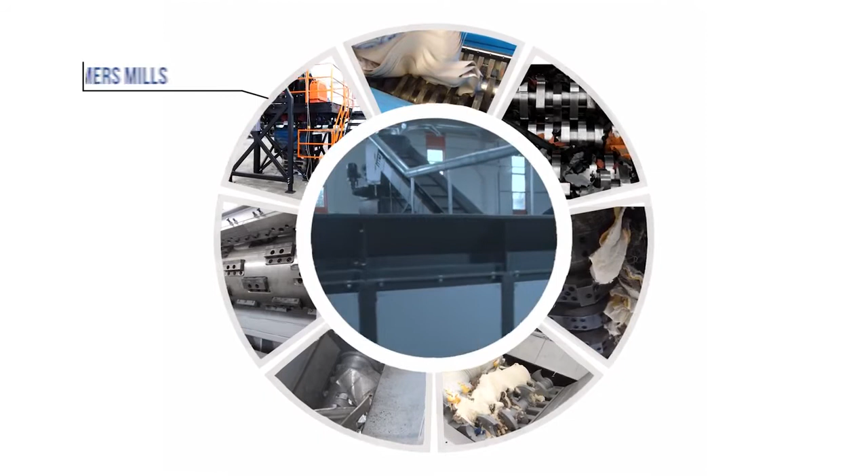So now Mr. Emanuele will explain in detail our range of products, starting from the single machine and then going on with the different complete installations. Please, Emanuele, it's your turn. Thank you, Luisa, thank you for your introduction.

So Forrec, as Luisa said, was born with the production of single machines. One of the first machines we produce is an evergreen product: the primary shredder, a two-shaft shredder, combining different kinds of options in terms of manufacturing. You can have different kinds of blades, like fixed blades in iron and steel, bolted knives in case of a quick change, or a knife refilled by a welding robot. We have a really large and huge size of dual shaft shredders, combining different power for different applications.

The other range we are currently producing is the four-shaft shredder, which reduces the volume, but at the same time gives you the possibility to size the waste according to your wish, for the downstream that you have later on.

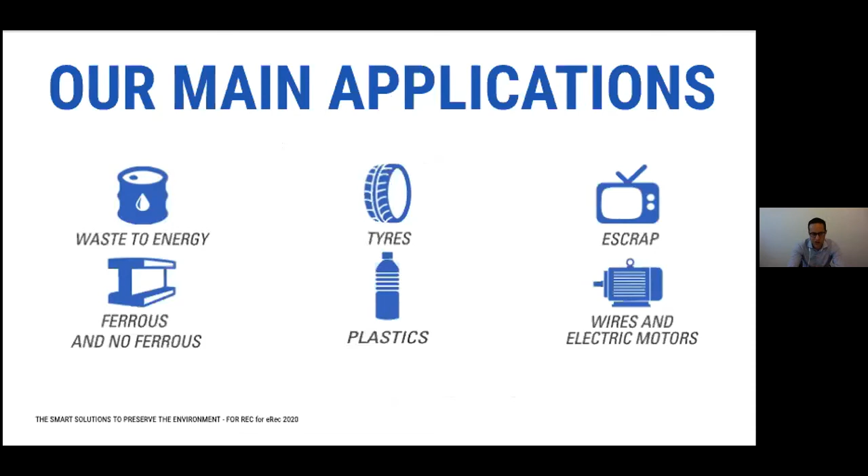So in general, as I said, and as you saw before, the machines that we design and directly manufacture are located within more complex and engineering plants suitable for the treatment of tires, e-scrap, refrigerators, or wires, or motors, or plastic. So a large turnkey solution that we can offer to our customers.

So let's go a little bit in detail and try to figure out the right steps to the correct and profitable recycling technology. The price is something that comes really at the end of your choice. But what we want to focus on is that the choice of the right machine is really important.

And that's the reason why I always insist to be not a sales, but a consulting, because by knowing exactly what is your kind of waste, what's your purpose, how the waste is - because from A to B, even though the waste could be the same, there could be a lot of differences. So I'm always pushing with my dealer and with my end user to provide me as much detailed information as possible. And that's the first step to go straight ahead to the right solution.

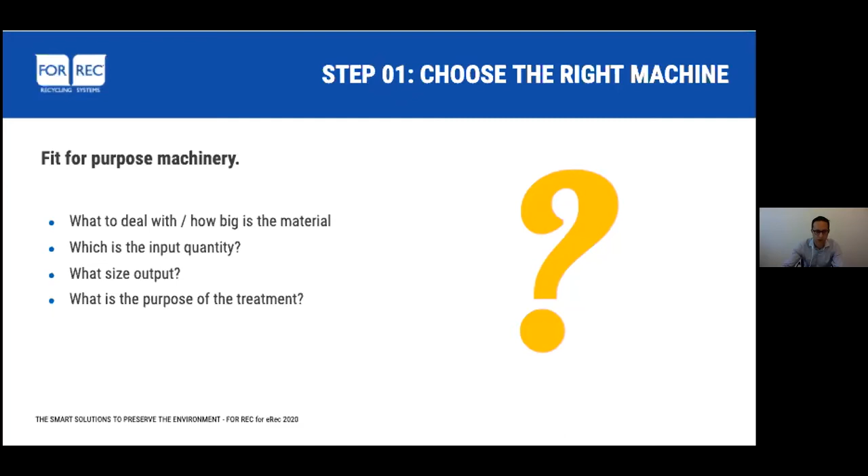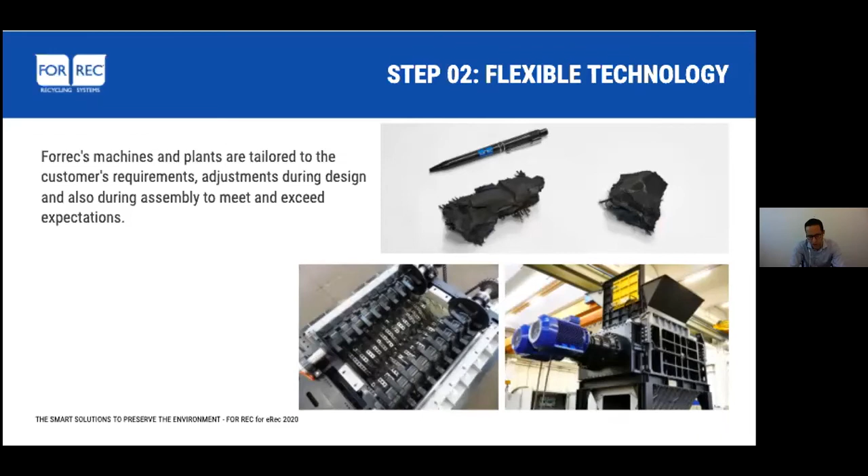For instance, some case history recently developed is the manufacturing of a specific machine for the tires recycling world. We met a lot of requests, especially from the cement world, from cement companies, I mean, where they would like to have a real clean cut product. So we designed that machine specifically for that world, for that application.

So how important is the design and the profitability in the shredder or in the plant? It's very important, and that's the reason why our technical office in Forrec has more than 12 engineers between project development and research of new performing solutions for waste treatment.

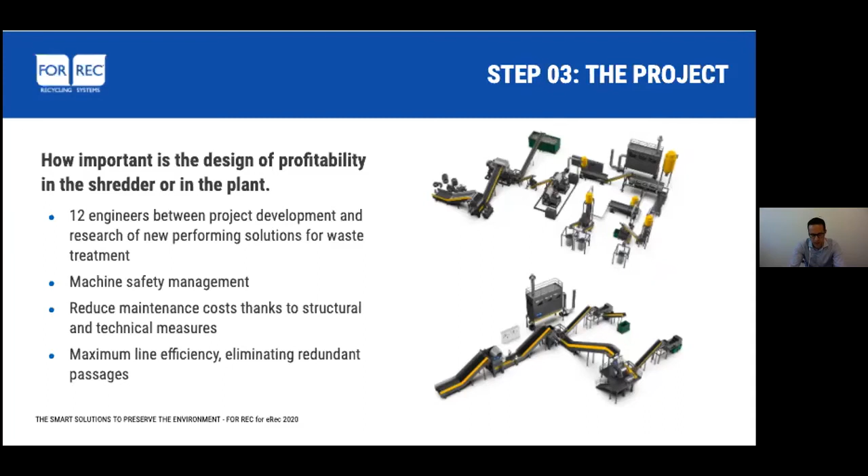They study the machine safety. We study how to reduce the maintenance cost thanks to a structural and technical measures. So we try to have the maximum efficiency as possible, eliminating redundant passages. So Forrec supplies single machines, true, but also we manufacture directly many components without going into outsourcing.

For instance, transport system, dosing system, unloading system. You know, the reason is very simple - many customers, I would say 100% of them, want to have one responsible for the whole line. And that's the reason why we decided to manufacture as much as possible internally.

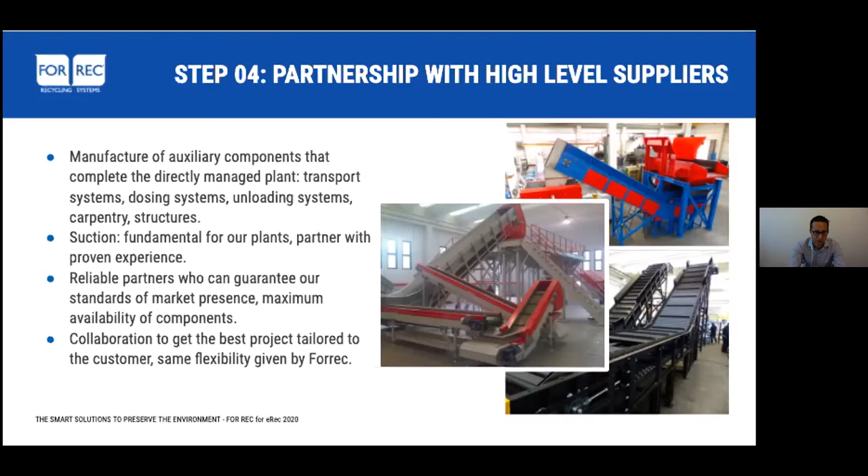One of the best cases I can tell you is the case of Belarus, where there was a company inside a technological park for waste treatment in Minsk that at the beginning chose us for the supply of a tires recycling line, full line, able to do approximately 6 tons an hour.

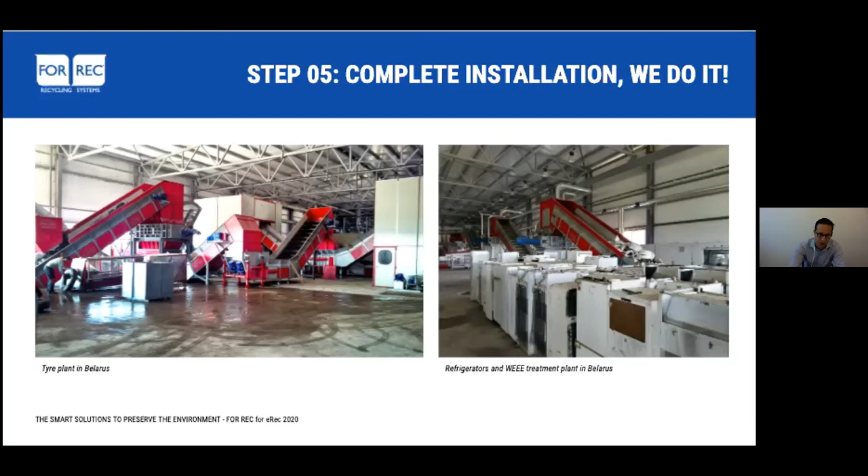And 6 months later, they chose us again for the installation and supply of our refrigerators and e-scrap line. Or the case of France of last year, where 2 leading waste disposal companies rely on Forrec for the treatment of refrigerators. So even though both with 2 different technologies, one with the cryogenic system, for instance, and the other one manages the gas combustion on site.

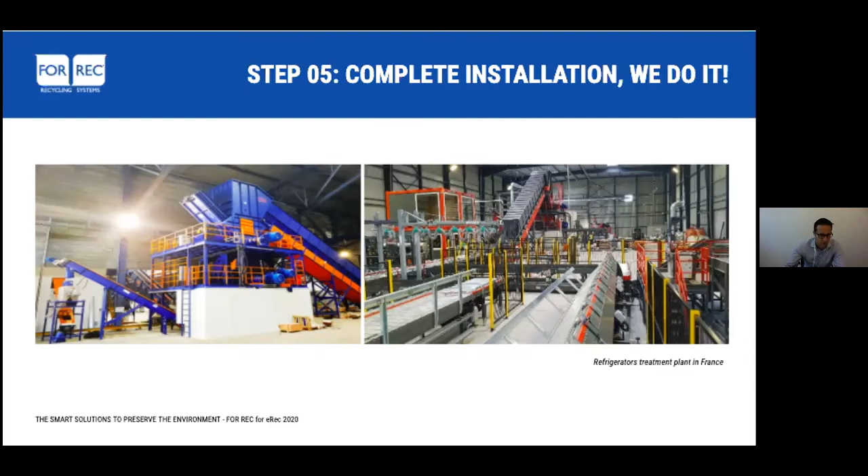Both request definitely higher professionalism, and the plants respond perfectly to the WEEE legislation, which is the legislation in Europe that rules such kind of dangerous e-scrap, trying to reduce the impact on the environment.

Or the case of Turkey, where Forrec is massively present with several lines for the treatment of aluminum. Over there we have more than 5 lines working with the single-shaft shredder hydraulic version, able to process up to 11 tons an hour.

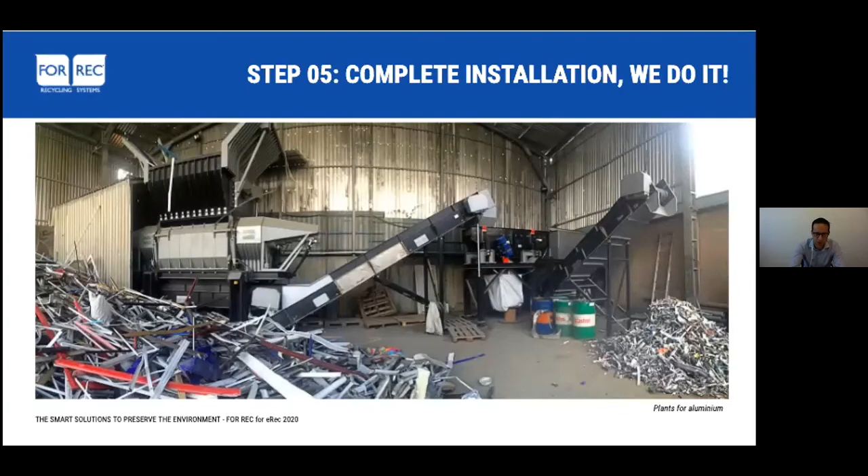Just to go into the circular economy from scrap to new material.

Recently, we have also improved and installed electric motor treatment plants that are a great source of profit for the customer, in particular because of the restriction of export to Far East countries of such kind of material. And I would say that the material that comes out from that line is very, very clean, profitable for the customer.

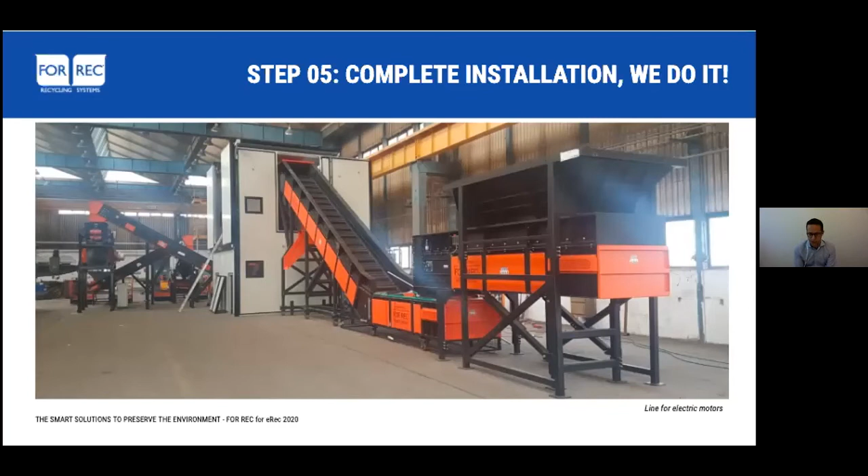The plant you see in this slide, for instance, is located in Hungary, and it has been implemented to obtain an ever cleaner product into the downstream line.

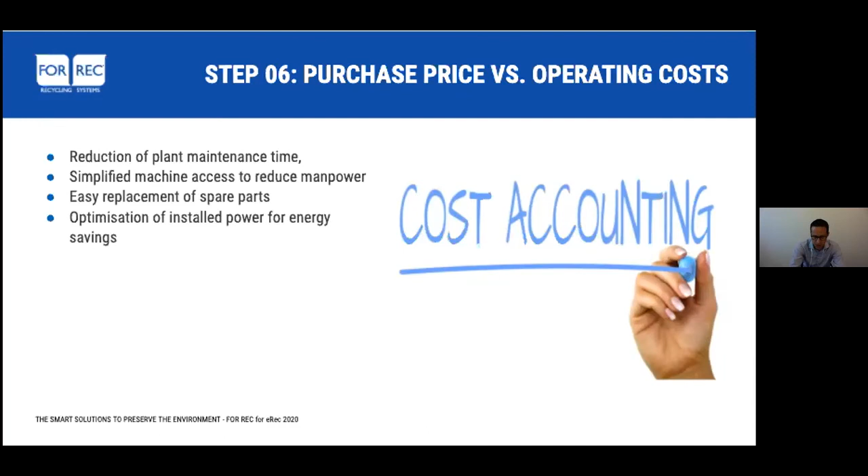At the end of the day, what we care about is that the investment pays for itself quickly, and that our plant has low operating costs, giving measurable profits. To do that, we tailor the design study for simple maintenance, such as reducing plant maintenance time, simplified machine access to reduce manpower, easy replacement of spare parts, and optimization of installed power for energy saving, for instance.

Service and support, how Forrec is organized. Forrec has 7 mobile workshops moving around the world with language-speaking technicians prepared for any kind of mechanical and electrical intervention, and 6 internal operators for remote assistance through internet, connecting directly from our server to the control panel of the end user, wherever it is.

We have 2,000 square meters of spare parts warehouse, available for ordinary and extraordinary maintenance, with loyal partners worldwide for fast delivery of spare parts.

We also provide customer staff training, so our customers know the machines and operations of the plant like we do. We always transfer our knowledge to the operator to make them autonomous in managing the machines.

We propose programmed maintenance to give continuous and complete assistance day by day to customers, or intervention in speed when needed, because thanks to our big warehouse we can send spare parts quickly in case of need.

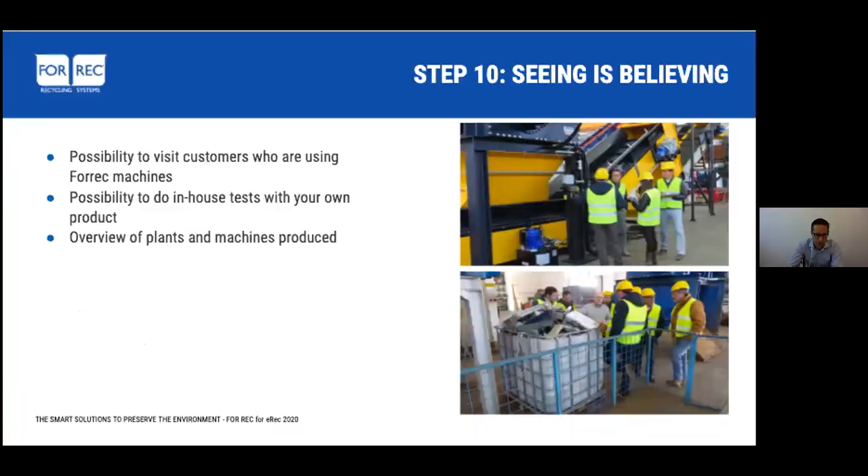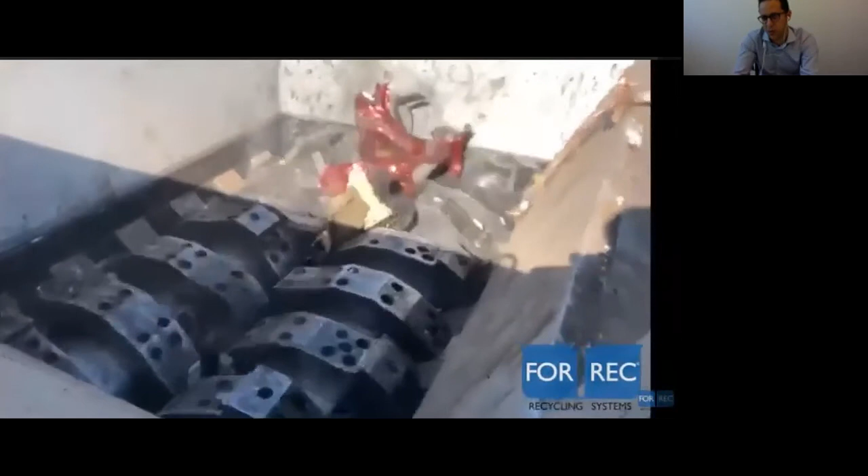This is an example of the rotary shear, where you can see a packed car gone in 1 minute. So let's let the video speak more than me — you see the incredible torque of that machine.

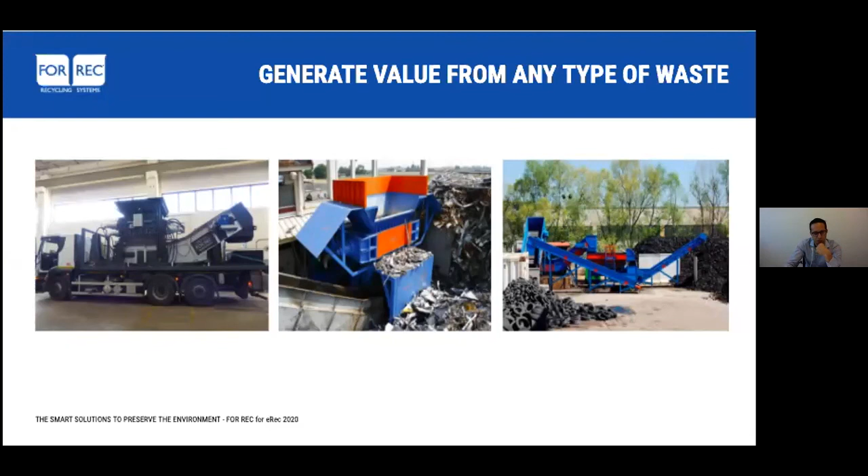Let's go with some case history, where you can see from these pictures some shredders. One in particular is mounted on a truck, on a trailer, or some shredders for scrap treatment or for tire applications.

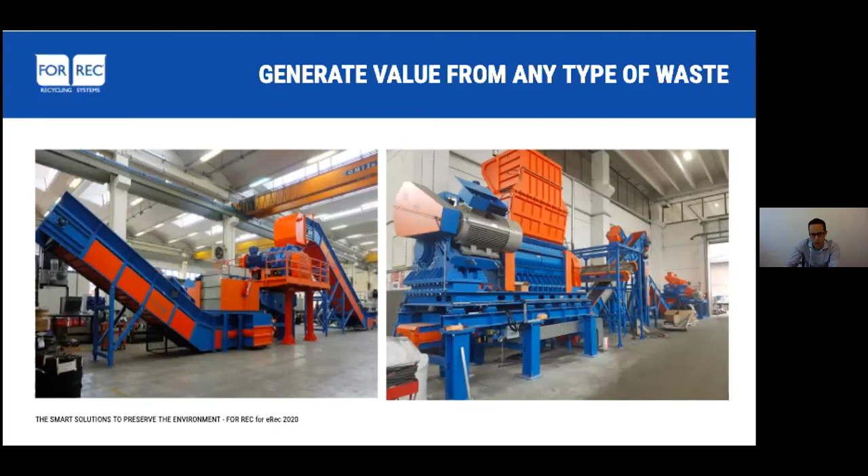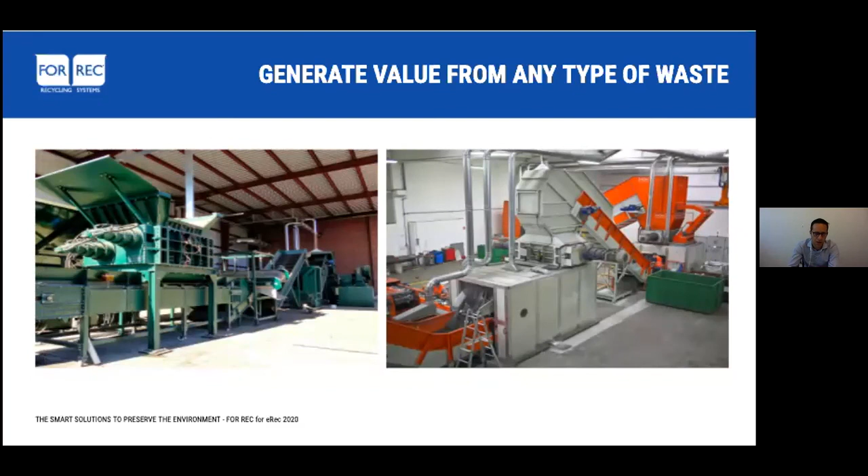So this shows a broader use of our equipment, as you saw in this presentation. If you have any questions, you can mail us, you can chat with us. I hope my presentation has been clear enough, and thank you for your visit.